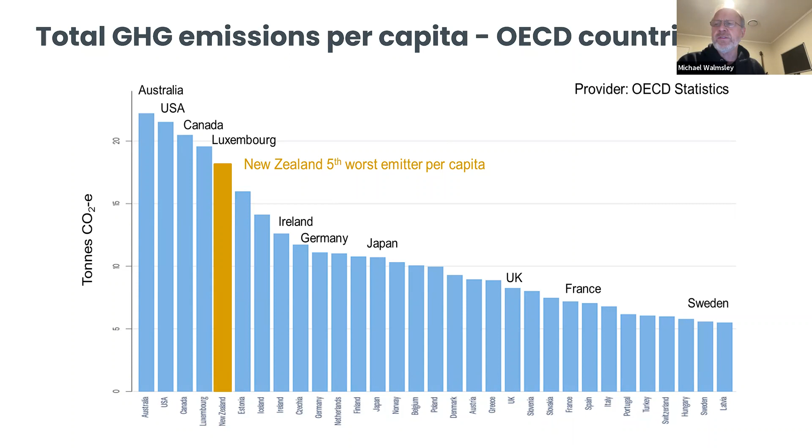So you might ask, what's causing us to have so many emissions? Next slide. Well, if you look closely at this busy slide, on the right-hand side you'll notice a big chunk of our emissions coming from agriculture. Agriculture and food production is one of our main industries, and the animals and livestock give off a lot of methane. They contribute up to 48% of our greenhouse gas emissions.

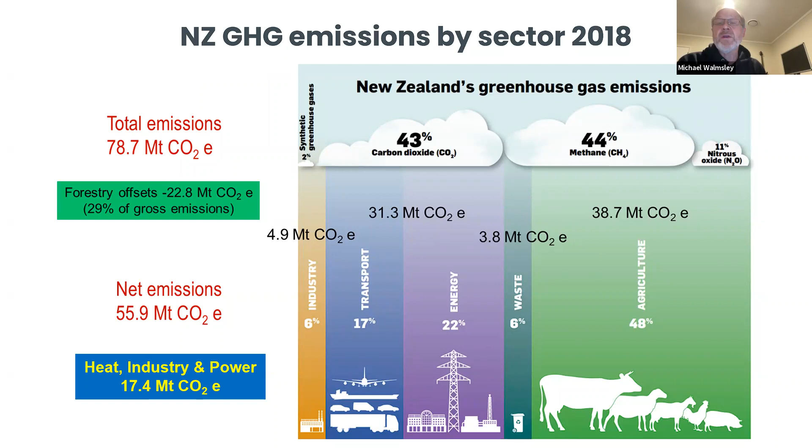So that's a real challenge for the country. If you look at some of the other areas where carbon dioxide is the main emitting gas, on the energy side we are about 80 to 85% renewable energy, so we've already decarbonised our electricity production quite a bit. There's still a little bit more to go, and that will happen. Transport will need to electrify. But over in industrial heat and power, combined, we have about 17.4 megatons of CO2 equivalent that we're needing to transfer over to some other form of energy production.

We also have a lot of forestry that helps us. Okay, so this is a breakdown of what our industrial sector looks like. As you can see, the food processing areas of dairy and meat are the largest industry sector. We have chemicals, iron and steel, cement, petroleum refinery, aluminium, pulp and paper, and mining and quarrying. So that food processing area is one we've been researching for some time, and we'll be assisting New Zealand in that space and also with some of the other chemical industries.

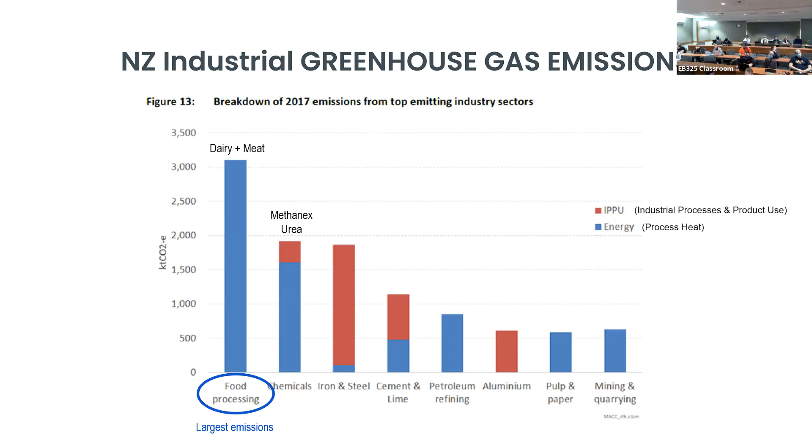Michael, just a quick question here, back on that slide - is that unique? Are there other countries where food processing is the top emitter? Well, if you go to the United States, there may be some states with a lot of food processing as well, if you break it down. But from a country's point of view, Ireland obviously has a lot of cows, but I don't know if they have as much as us - our livestock numbers are fairly high, they outstrip the people by quite a bit.

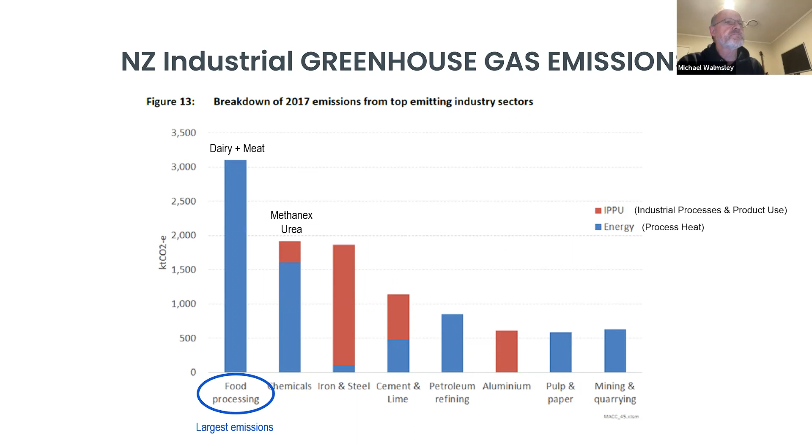The government has a number of schemes that they're pushing, quite a plan for decarbonisation with the current government. The Resource Management Act is going to be banning coal boilers, so there's a real push for the industry to change. The industries we're working with are under a lot of pressure to move to biomass and make their plants more energy efficient.

There was a Climate Change Commission report done by a broad range of individuals to outline the areas we could attempt to address. Government is looking to turn that into policy and firm action. An example is government investing in decarbonising industry through a fund called the GIDI Fund, to help incentivise change and part fund projects that lead to CO2 emission reductions.

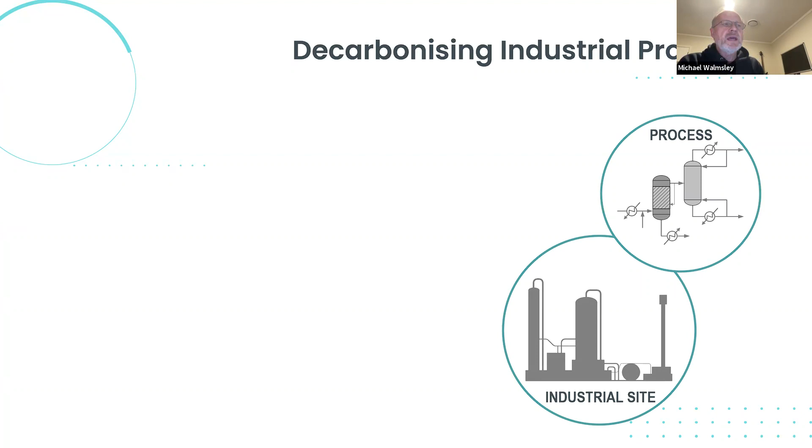Let's talk about the focus of our research—three main areas. We'll be looking closely within the process itself at ways to make it more energy efficient. We'll also be looking at industrial sites, and at the community and factory edge, and how we integrate things with regions and the renewable energy production occurring in various regions around the country.

The factories are located out there in rural areas in a lot of cases, and there's opportunities for renewable energy to be gathered in those regions. So looking at the process, these are some of the ways we're looking to reduce demand.

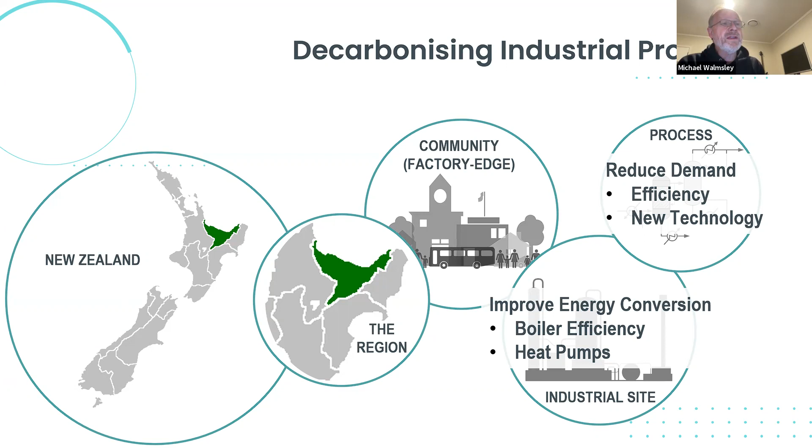Efficiency improvement, integration of new technology—heat pumps, for example, mechanical vapor recompression, say in evaporator systems. We'll be looking at improved energy conversion. If we are going to be using electricity, how do we get the multiplier effect of heat pumps? How do we make sure our boilers are as efficient as possible with recuperators in there to lower the exhaust temperatures?

As we go out to the factories and communities, if we're going to have solar panels on the roofs of houses and factories, and wind turbines, how do we use the factories as, in a sense, energy storage mechanisms that enable that renewable energy to be used most efficiently?

As you can see, New Zealand is long and slender. There's a backbone electricity grid that runs through the country, and where the factories are at the edge of the grid, there's real value in trying to integrate the renewable energy where it is being used.

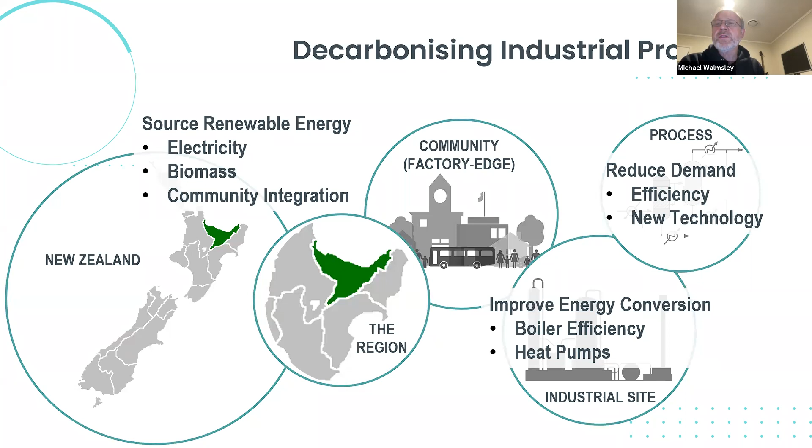This leads on to what we're doing in the digital twin space. Those of you who have studied digital twins already know it's a digital representation of something that looks like a real process, behaves like it, and connects to a physical system, with the goal of improving decision making and, in our case, efficiency and reduced emissions in how the plant is run.

What you see in front of you is also borrowed from some of the work of your guys—we've just added the retrofit option there. We've been doing work in the retrofit space and how we can add heat exchangers and heat pumps in a smart way. But we're looking at all of those scales.

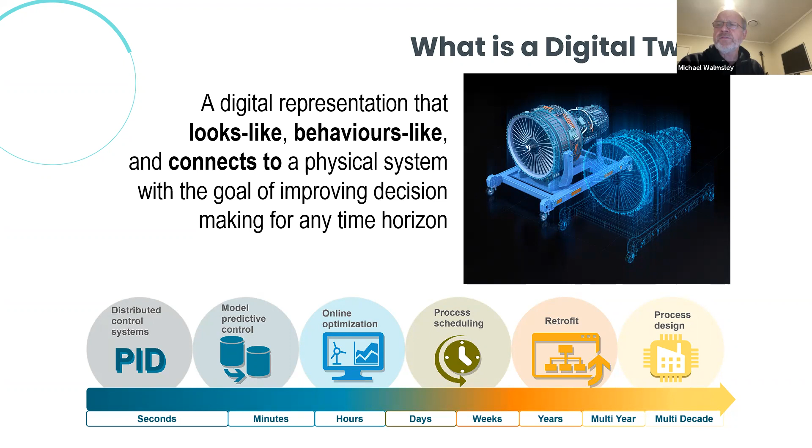We've got process control experts in our midst, those that are very good at online optimization and process design as well.

Okay, so if we have a look at digital twins, going into a little bit more detail, let's have a look at what 'looks like', 'behaves like', and 'connects to' breaks down into.

When we talk about 'looks like', there's a number of ways we can do that. We've got a one-dimensional model, typical process flow diagrams. You've got a 2D model, which might be a piping and instrument diagram, all the way to a 3D CAD model. So there's various levels of complexity we can go to there.

Over on the behavior side, 'behaves like', those of you involved in process simulation know it all starts with steady state mass balance.

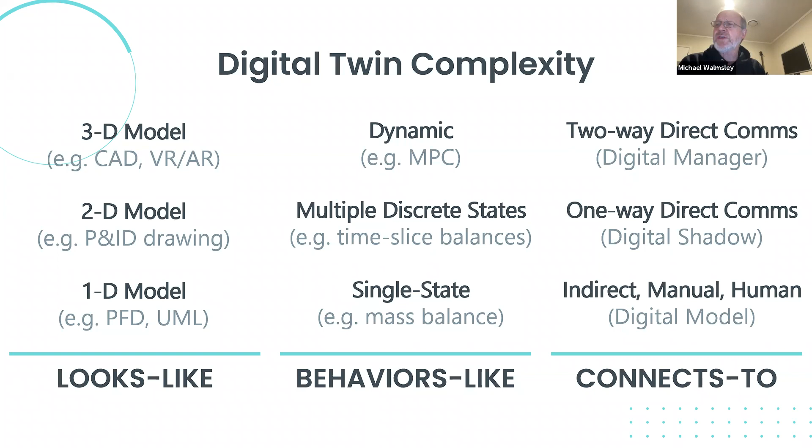We can go to more sophisticated multi-discrete state, pseudo-dynamic analysis, and ultimately full-scale dynamic modeling. On the connects side, there are a number of states we can exist in, where you can use your digital model to guide the factory, mainly through a human indirectly influencing what happens. But imagine we've got the digital twin up and running, able to connect one way and assist the factory with directly communicating and guiding optimization - we call that a digital shadow. Ultimately, a two-way direct communication system is what we're calling a digital manager. All three of those we consider in the class of digital twin, with that top right-hand corner as an ambitious goal to work towards.

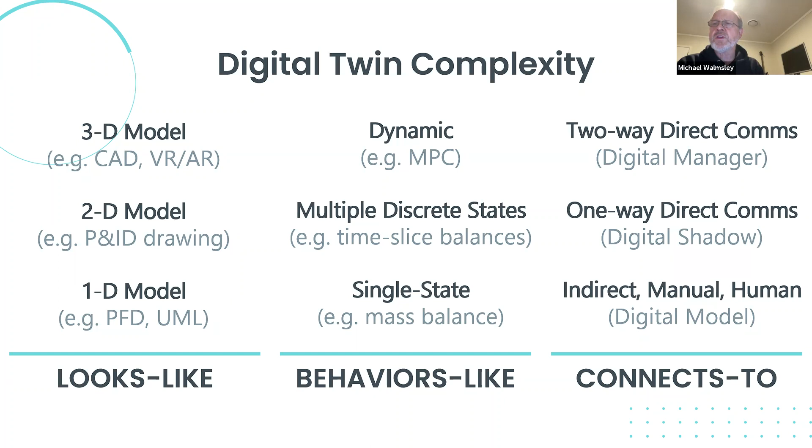Here's another way of expressing looks-like fidelity versus behaves-like fidelity, with a breakdown of various modeling approaches, from simple block diagrams all the way to full transient CFD modeling with intensive computational requirements. So where are we operating at the moment? We're developing steady-state process simulation with some physical layout considerations - that middle section is where we think there's room to develop a lot more, and to apply those tools to industry to assist them in decarbonizing.

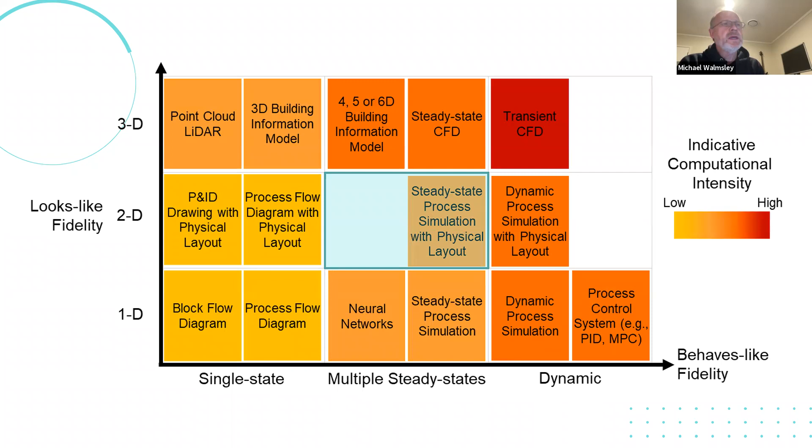When it comes to how you apply digital twins within a life cycle assessment, there's a number of stages - the design phase, the operational phase, and the service phase. There's quite a list of ways these digital twins could be applied. The goal here is to be accurate enough that industry is able to use the information generated from the digital twin to assist them in de-risking projects.

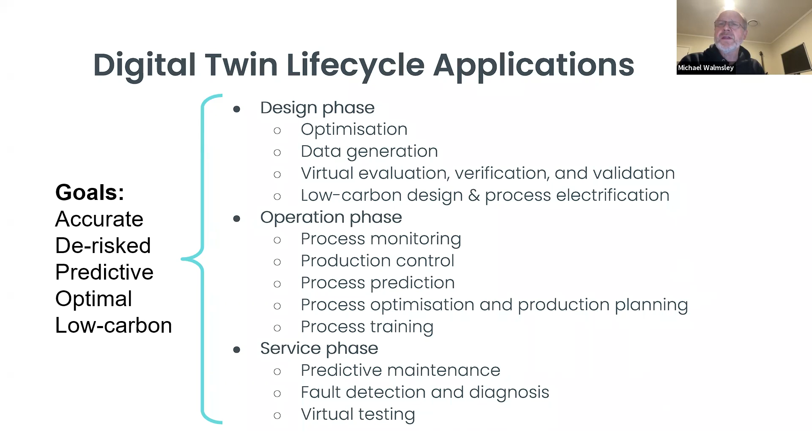Whenever we put up ideas that enable decarbonization, there's concerns about how risky this is. If we can do pretty reliable what-if analysis, that assists in de-risking them. So there's a level of prediction that has to be done. We've got to come up with optimal solutions that are low cost and will potentially lead to lower carbon industries, further expanded in those three areas of design, operation, and service providing.

This is an asset optimization cycle that we see things going through, both on the operational side and the asset improvement side. With the digital twin, we want to have access to plant data, and we need to be able to reconcile that. We're hoping to develop machine learning methods to have a dynamic digital shadow that can be used for adaptive control at the operational level.

On the retrofit and changing of assets, you can use it in digital model form, look at automated retrofit analysis, use it in the digital shadow, and then provide advice to the plant to make changes. That's a quick introductory summary of some of the areas we're working in and moving forward on the digital twin side.

I'm now going to ask Tim to step in and show you a couple of case studies of PhD work and postgraduate study work that we are doing from some of the students. Okay, hand it over to you, Tim.

Thank you, Michael. So we're going to talk about two pieces of work that have happened fairly recently. The first centers around this idea of how do we deal with plant measurements and how do we create machine learning models from those measurements. The second is around low carbon design, decarbonization through better design and electrification.

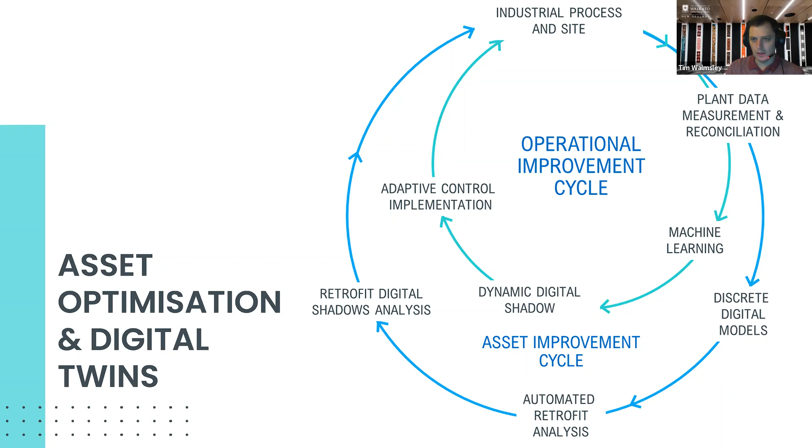This piece of work was primarily driven by our PhD student at the University of Waikato, Isaac, and it's also being presented at a conference down here in Australasia called Advances in Digitalization of the Process Industries. His work focused on this real dilemma when you go to digitalization, of what we call unexciting industrial data, or sometimes it's also called imbalanced data.

This concept is a little tricky to understand at first, but essentially this is data from one of our geothermal power stations that we work closely with. It's the idea that we run the plant at a particular state and try to control it to that state or nearby. As conditions change, it might go to slightly different states, or the steam flow and amount of geothermal fluid coming out of the ground slightly changes in terms of flow rate.

So what you end up with is a lot of data for the states you are commonly running at. But when you're trying to build a model that represents how the plant runs, it can be very skewed towards the common states, and the less common states don't get very well represented.

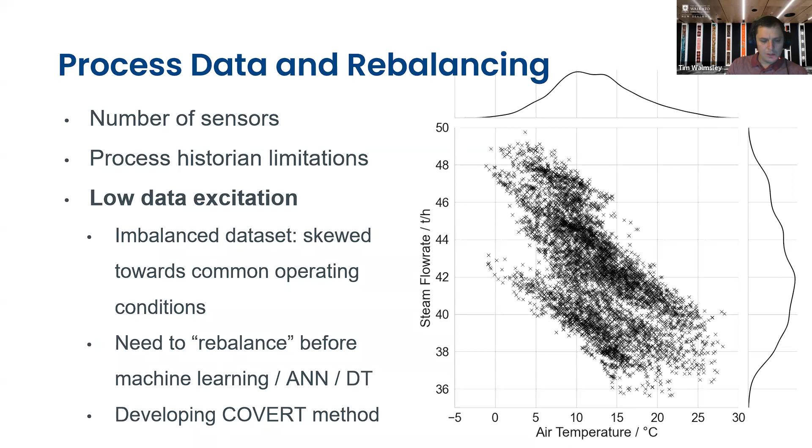This is a problem we face with a lot of industrial data sets, and there's a need to rebalance the data before going into machine learning or creating artificial neural networks, on our way to digital twin type stuff. So the student developed a method he's called COVERT.

Let me give you a brief illustration of the data set he used and some of his key results. We were looking at a binary cycle, which is essentially - what's that one - a flash, and maybe it's, no, organic Rankine cycle is the common name, is what you'd probably know it by. For his analysis, there was a data set with 13 different variables, 9 being input and 4 being output.

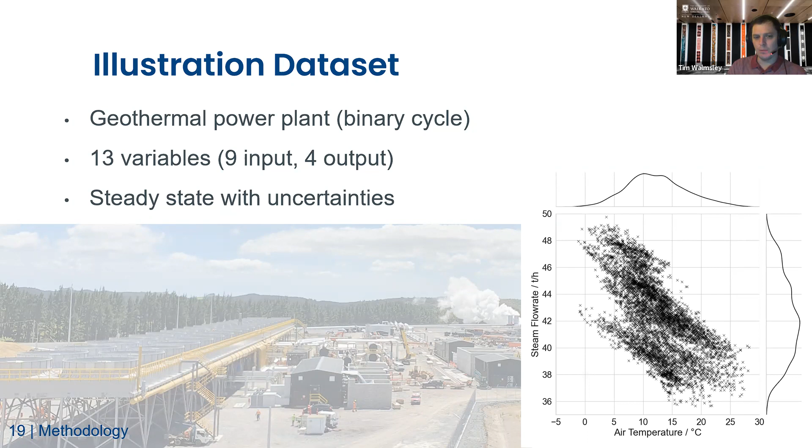And of course, there's uncertainties associated with a lot of this data as well, so you have to consider that and prevent from overfitting the data.

His algorithm essentially tried to look around the data set and find areas where data was relatively rare. This is just one example of choosing an anchor point and then trying to predict using a complex algorithm around interpolation between the data set and more common areas.

We won't go through all the details of the algorithm, but it was a method to try and predict what was going to be in between the two data sets. One of the key things here was he was trying to make sure you didn't necessarily maintain the same distribution of data across the data set - fundamentally you're trying to rebalance and redistribute the data and the weighting, so that you would prevent yourself from producing a poor fit.

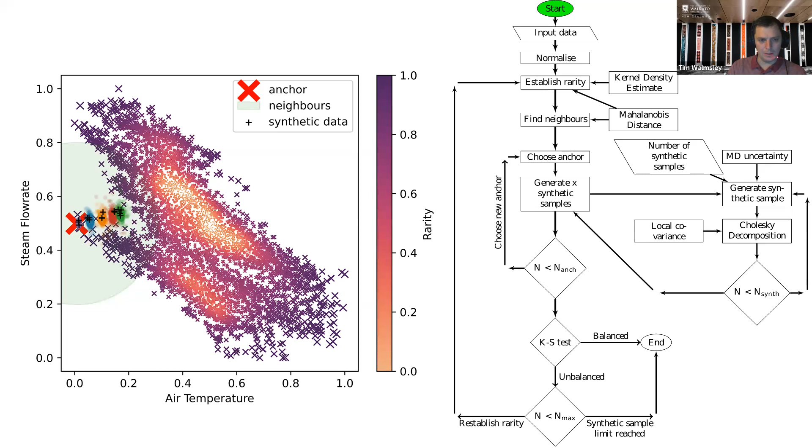I'll show you what that means in a minute. So this is essentially the algorithm showing multiple anchor points, filling in data from a 2D perspective of just steam flow versus air temperature that has been normalized. You can see that the full name there is classless oversampling technique.

If we now translate that into more of a three-dimensional representation, with power being one of the key outputs from the power station, you can see it's starting to fill in data around the edges, particularly of the data set, with relatively few in the middle. There are a few little patches there.

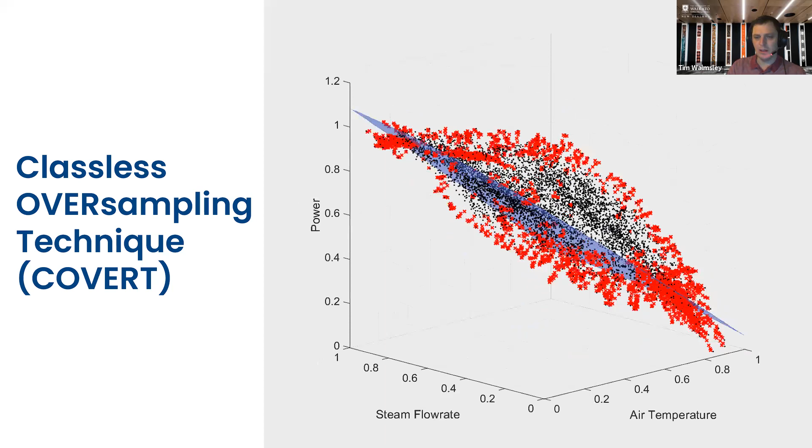If we now take that data and compare it to, say, a HYSYS model, which is trying to make the connection between power, air temperature, and steam flow, you can see it definitely follows that plane, but there's obviously a lot more other variables going on here that aren't fully getting represented in the Aspen model.

So the next step is to look at really what difference this Covert algorithm of rebalancing the data makes. We've got the Aspen model as our blue plane, and that represents what we think is sort of accurate for the given conditions that are being put in.

Then you've got here the red plane, which is what you'd achieve in terms of a machine learning model if you were to just take the original data set. What you can see here is particularly around the corners, the far corner there, where it's 0,0 on the steam flow and then 1,1 on the steam flow, you can see the model bends down dramatically.

And this is not being predicted to that large extent with the Aspen model. After we've rebalanced the data and tried to more fairly represent more of the states that we believe are possible, you can see the new machine learning model based on the rebalanced data is significantly closer to what Aspen would predict. But at the same time, it's using the real data set, so there's an air of more realism to that model as well. We're trying to target the best of both worlds here, where we can rebalance the data set and get a much better machine learning model that can then be used in control, retrofit, and other areas of analysis.

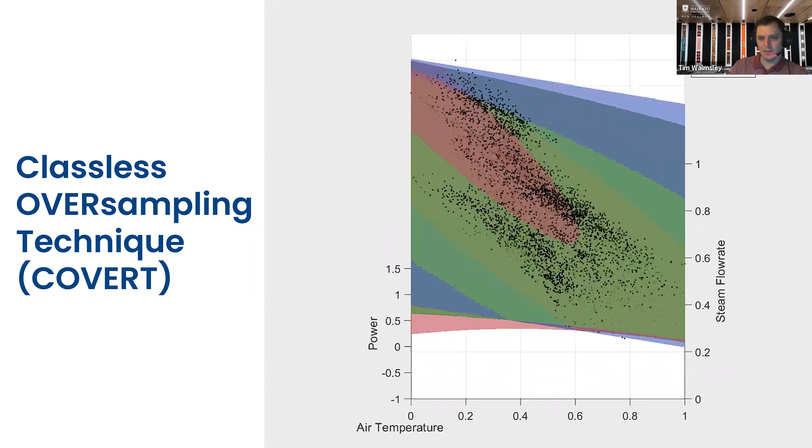So that's just one piece of work that's been going on. Now I want to flip over to a very different piece of work, just to give you an illustration of the breadth of research that we do.

This was a research and development project done by three of our honours students, Ben, Alyssa, and Lana, and they studied around trying to develop an electric milk evaporator. As Michael pointed out very early, we have a large dairy industry in New Zealand. Fonterra is one of our key partners for our research program.

At the moment, most of our evaporation is happening by a combination of electricity and thermal heat or steam. So just to give you a bit of an illustration, the New Zealand dairy industry in terms of milk production is very similar to California. We produce around 19 billion litres of milk each year.

And what this translates into across our country is, when we're at peak production, we're producing anywhere around 200 to 250 tonnes an hour of milk powder. We turn 97% of our milk into exports, and about 75% of the milk goes into milk powders for export around the world, into Asia Pacific, over into Europe as well.

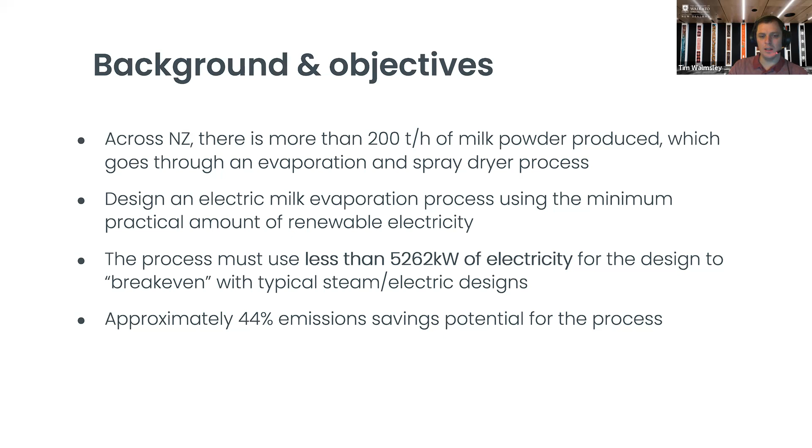So we took a base case. This was based on one of our plants in New Zealand. That's one of the larger plants, with a dryer around 30 tonnes an hour.

Basically what you've got here is two distinct processes that happen. First, you've got your milk coming in really cold, heating it up to around 95 degrees. That process around the 95 degrees is what we call a heat treatment process. It's a sort of pasteurization, but not necessarily a full pasteurization all the time. In this plant, it was going into a 2-effect evaporator.

The first effect was integrated with mechanical vapor recompression. If you're not familiar with that technology, it's basically you take the vapor that you've evaporated from the milk as you're concentrating it, recompress it, say 5 or 6 degrees in terms of saturation temperature, and put it back into the shell side so you can evaporate more water from the milk.

And then the second effect was integrated with what we call thermal vapor recompression, or steam ejectors, where we just had steam coming in, helping to recompress a little bit of the vapor that was coming out, and the remainder was going to a condenser. So this was the general structure of where we generally are at in New Zealand.

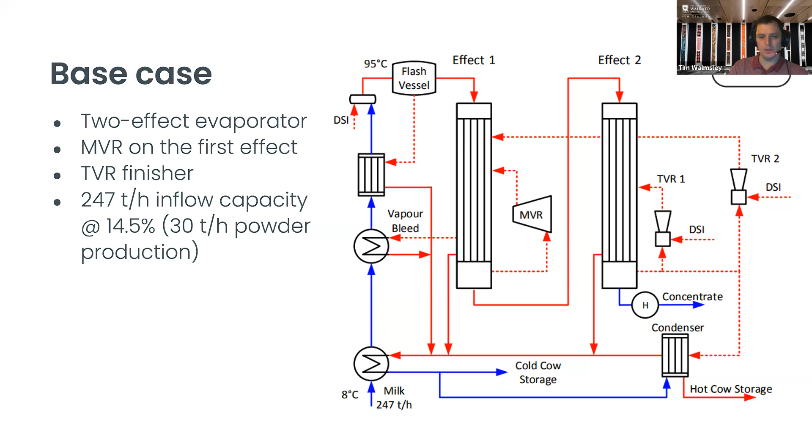And so you can see there the production rate and what the milk solids percentage is coming in. That's for whole milk powder.

So the team started to look at developing a model of what is happening in this current evaporator. They developed a detailed Aspen model around that, talked to a number of the experts at our OEM that's just located up the road from our university,

and started to apply a technique called pinch analysis to identify how we should best integrate heat pumps and vapor recompression into the system, and then followed an iterative process of gradually putting in more and more electrical operations, such as compression and heat pumps.

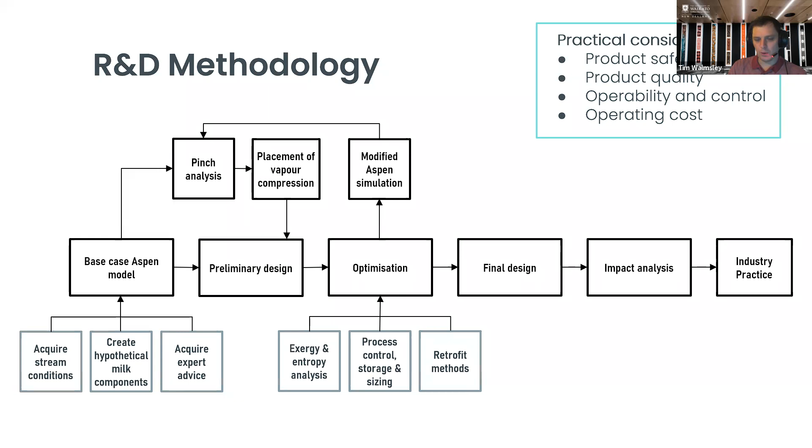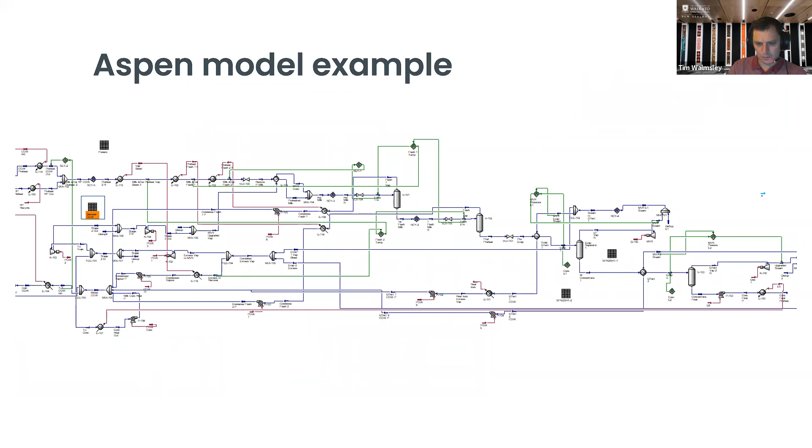So just to give you a little bit of a snapshot of their Aspen model, this was of the original plant, before we made some modifications.

In case you're not overly familiar with pinch analysis, in essence what we try to do is take all of our heat sources in the plant that we have available to recover heat from, and composite them together into a common curve, which represents our red curve on the TH diagram. Then we take all of our sinks that need heat around the plant and composite that into our blue curve.

From this diagram, we can move the curves together, we can pinch them, in order to find our heat recovery possibilities and our minimum hot and cold utility that we need. So generally with pinch analysis, you find a temperature which divides the problem into two spaces: above the pinch you need heating, generally steam, and below the pinch you need cooling.

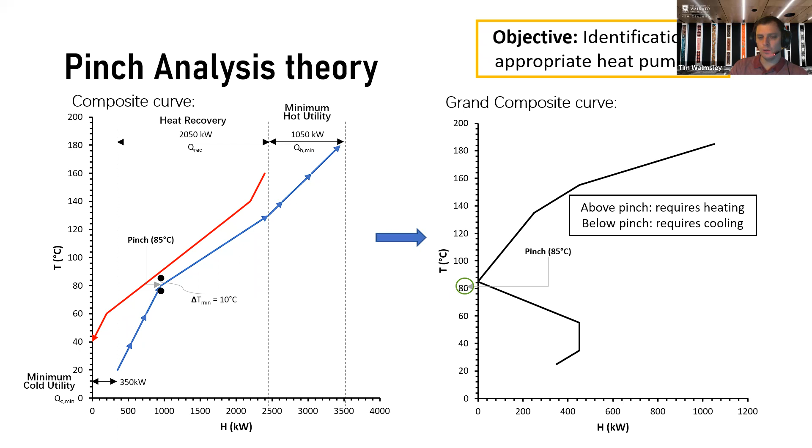This sort of analysis has been applied a lot to the chemical and refinery industries, but the key reason we wanted to use it here was to help identify locations and ways we could take heat from below the pinch and upgrade it using heat pump technology to be above the pinch. So let me walk you through some of the iterations the team took.

First, if you take all the data out of this flow sheet, with all the evaporation and condensing you need, you get a grand composite curve, which shows the net heating and cooling demands across all the temperature levels.

The first and perhaps obvious result they found was that on effect 1, which is doing the majority of the evaporation, we should be using a mechanical vapor recompression unit, a compressor to recompress the fluid.

As we take that out of the analysis and assume it's integrated as part of the process, we get a new curve where we can again look and find another case - this is essentially effect 2. We're going to take the fluid from down the bottom here and recompress it up to the top. So that's another key result.

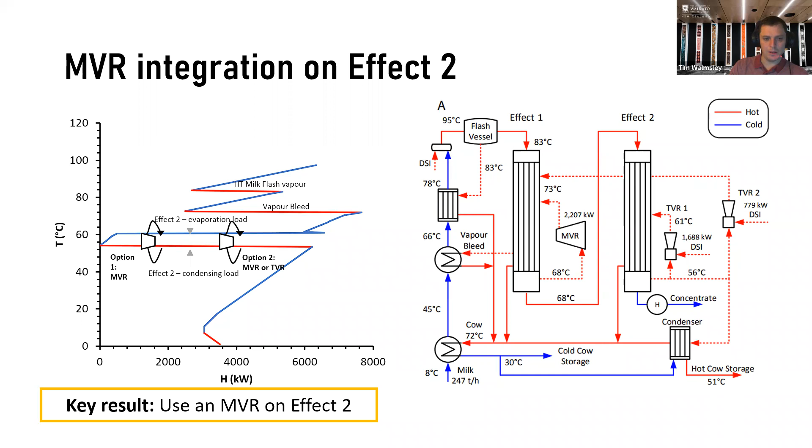Now if we go one step further and remove that from our analysis, we end up with a curve that looks more like this. Conventionally, with pinch analysis you'd say there's not too much more opportunity for heat pumps - this large pocket area below the vapor bleed from the first effect, we should just internally heat integrate. There's only a little bit left and not much opportunity for heat pumps.

But because we were trying to go for a fully electric solution, the team investigated what happened if we just recompressed around the top part, and then recompressed and used heat pumps around the bottom part.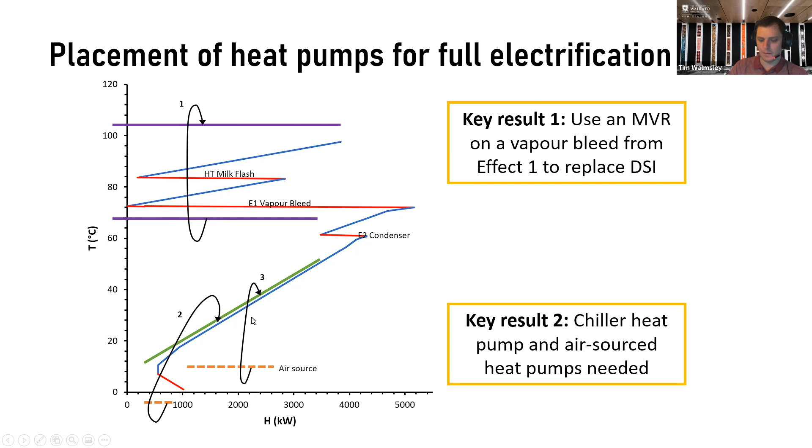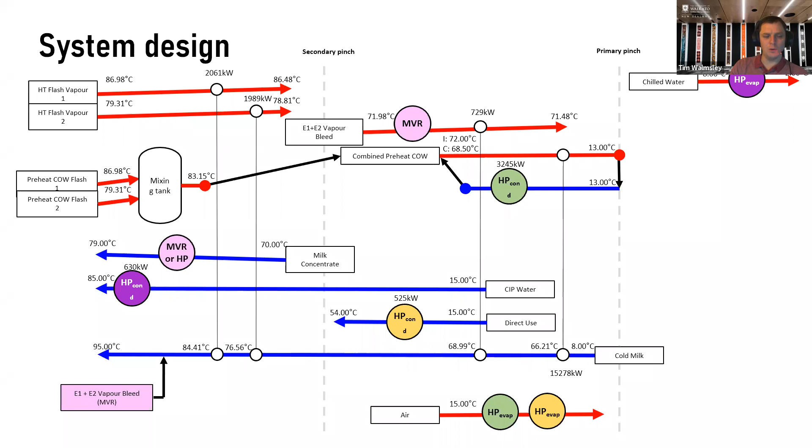They put that into a system design using what we call the grid diagram, which is basically a simple representation of all the sources and sinks around our plant - first placing where we're going to put our heat pumps, then deciding on the key matches to get the integration we're looking for. Skipping over a few steps, they arrived at this design.

Let me walk you through it briefly. Our raw milk comes in and is being preheated using condensated whey - condensate coming from our effects and some of the other pre-train parts of the preheat system. That takes it from 8 degrees up to about 68 degrees.

We've also integrated here a CO2 heat pump, because we don't have quite enough heat to do this duty from 8 to 68 - we've run out of waste heat from our system. So we've got a bit of duty coming in here from the air source heat pump.

Then moving up, we've got a vapor bleed that's coming from our first effect. The vapor bleed is just doing a little bit more preheating, just a few degrees, but even that few degrees is around about 400, 500 kilowatts. So it's not necessarily a small duty either.

Then we come up to our direct contact heaters. It's very common when you're trying to process milk, particularly around pasteurization temperatures, you need to heat it and cool it rapidly. So what these vessels are able to do is on one side you've got flashing of the hot milk coming down, and then that flashing is condensed into our cold milk that's heating up.

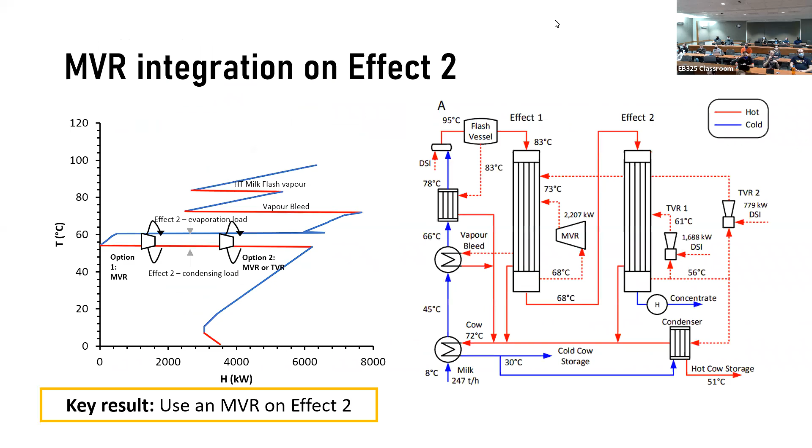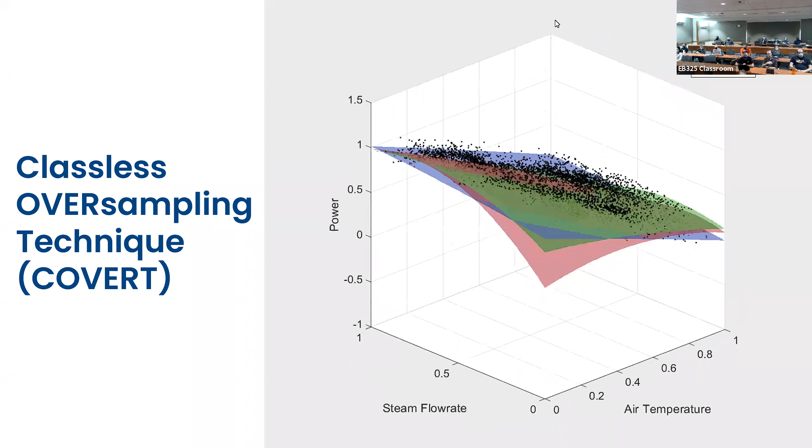I had a question. You had that problem where you had the uncertainty in your points of the machine learning model, and you were trying to sample more from the edges of the distribution. That's something I've run into a lot with power grid modeling as well. Do you know the different advantages and disadvantages between the machine learning approach and importance sampling, like skewing your distribution to statistically sample more from the edges of the distribution? Does that make sense?

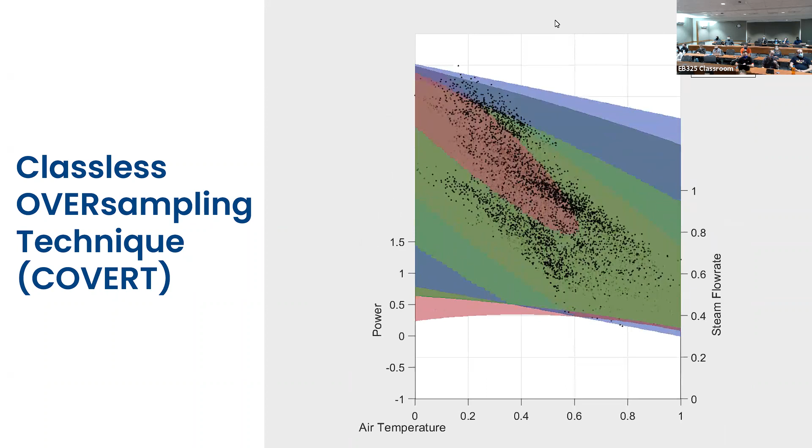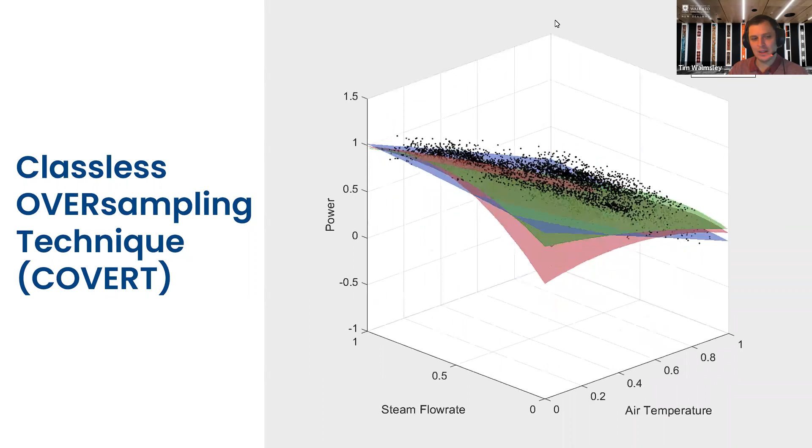Well, it's probably best if I got you in contact with the student. He's on a different plane to me with regards to this work. I wouldn't know the advantages and disadvantages, to be honest. It's really interesting to see that applied in other fields. It'd be interesting to see how his algorithm would work on a slightly different data set, to see whether it would make any improvements.

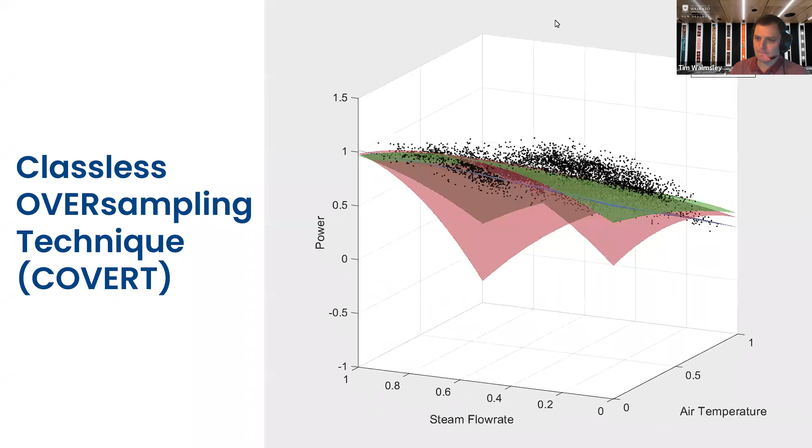If I can just jump in here, for you students doing postgraduate studies, one of the things we're keen to do in our research group is student exchange, where some of our PhD students come up and visit you and do joint work, and potentially one of you guys come down to us. We see our effort as a collaborative global effort, so if you're interested in this area, we can connect you with the Waikato student, and if you have an interest in connecting to us and coming to do research in New Zealand, that is a possibility. Daniel, it looks like you just got a plane ticket.

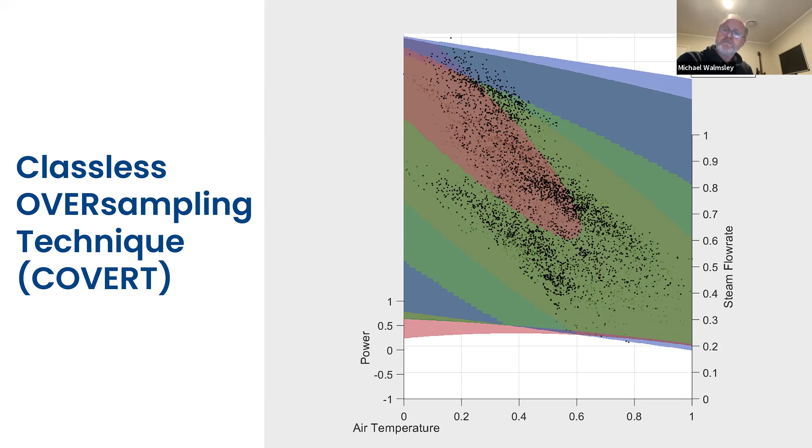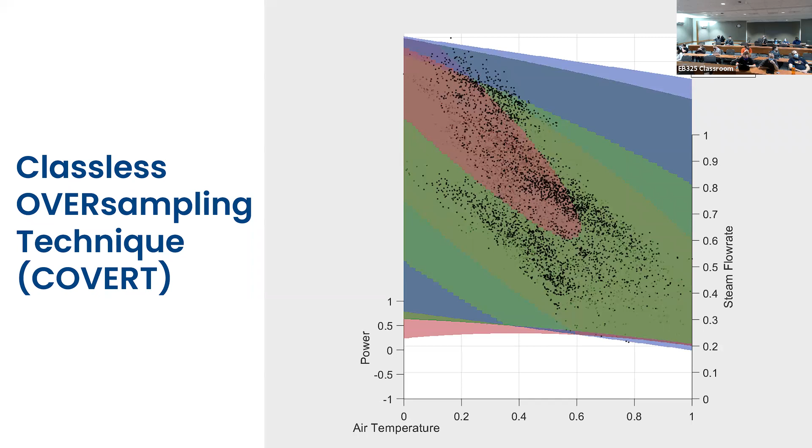Tim, I just had a question about some of the additional heat pumps and other things you're putting in. It seems like it's more heat exchangers. You kind of touched on that with this evaporator, condenser - it eases the process, you don't have to clean the heat exchangers as much. Can you say something about that, with the added complexity of this heat integration? What's been the feedback from the people who are doing this on the ground that would run this equipment? Did they say, hey, that's a great idea, but it's not practical because we have to clean these heat exchangers so often, or what kind of feedback have you gotten?

So typically, to give you an idea, milk evaporators run on a cycle of about 16 to 18 hours. All the plants in New Zealand have heat exchangers through the preheat train and all over the process. Some of those heat exchangers, especially around the 45 to 60 degrees Celsius range, that's where we have what we call thermophile growth. So those heat exchangers we have in parallel, and we'll pull some offline for maybe a couple of hours, clean them, and then the other train will come online. So it's quite common to have parallel trains within a single evaporation process, and you might have sort of 4 evaporation processes in parallel as well, with 3 on, 1 off sort of arrangement. So it's not uncommon to have that level of heat integration.